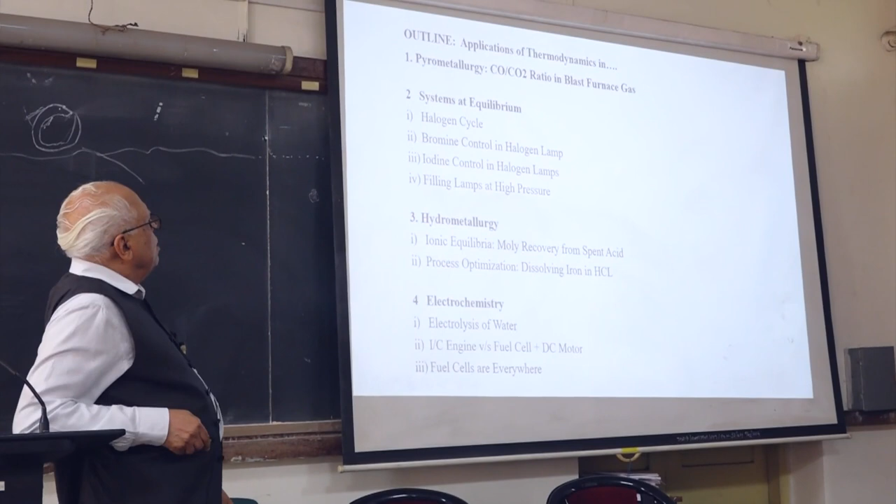So this was for me a big change, to come from looking at excise and sales tax, to looking into delta G and delta F. Let me begin with the first slide. The outline of the presentation is actually case studies. First we look into pyrometallurgy, beginning with blast furnace. Shall I start? So we will begin with blast furnace.

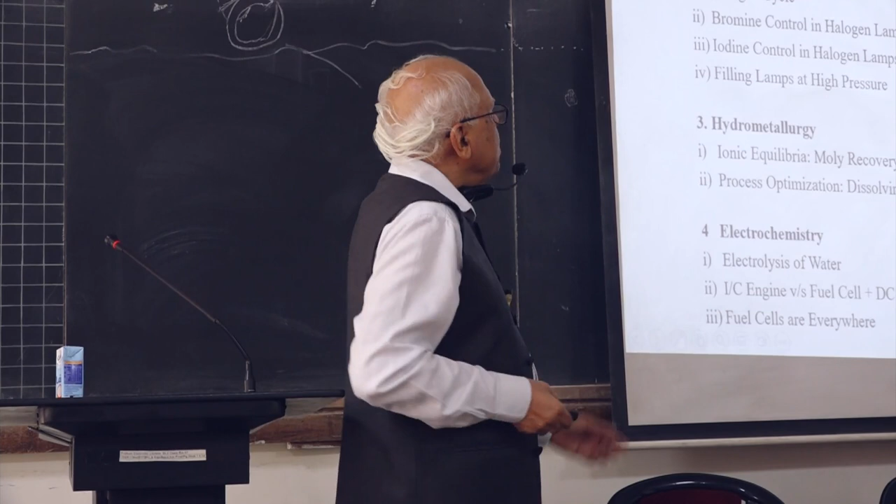When we were undergraduate students, all of us had to go to a steel plant for 2 months of training. I don't know how many people here have - please raise your hand if somebody has seen a blast furnace. You have seen a blast furnace? My God, okay, I'm very pleased that at least there are a couple of them. We spent 2 summers, April and May, in Bhilai taking practical training. Anyway, the blast furnace steel industry was the main employer of the metallurgist, and we'll begin with blast furnace.

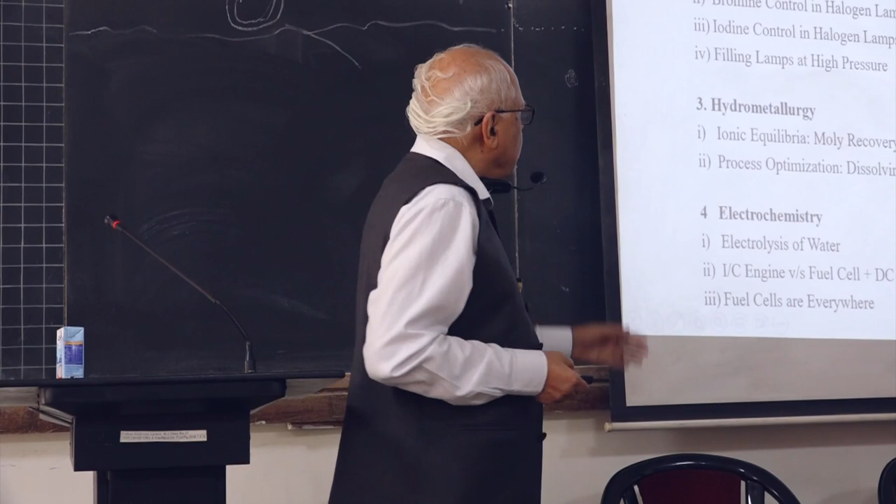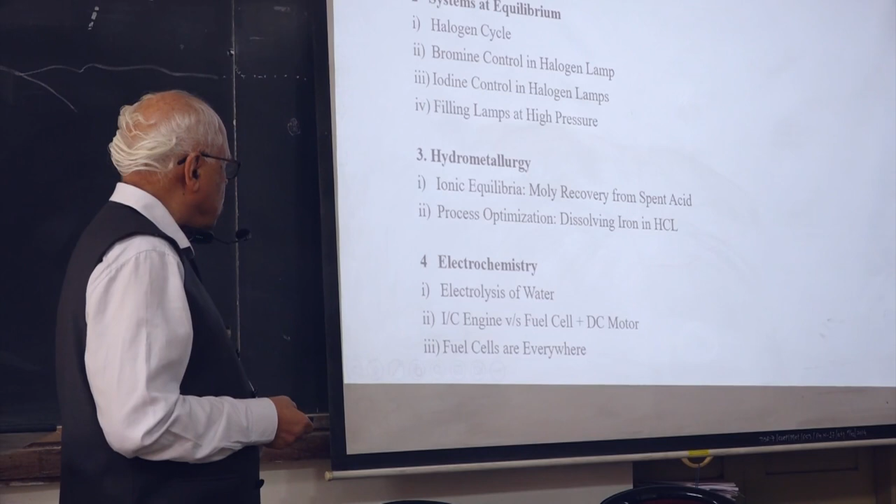Then we'll go into systems at equilibrium. At equilibrium everything is fine, but you want the reaction to go forward - so what do you do? Then we'll look at the equilibrium system, then some examples of hydrometallurgy: molybdenum recovery from waste acid, and optimization of iron dissolving in HCl. We'll finally end up with electrochemistry and go to the hydrogen economy in terms of electrolysis of water, IC engine, and then fuel cells.

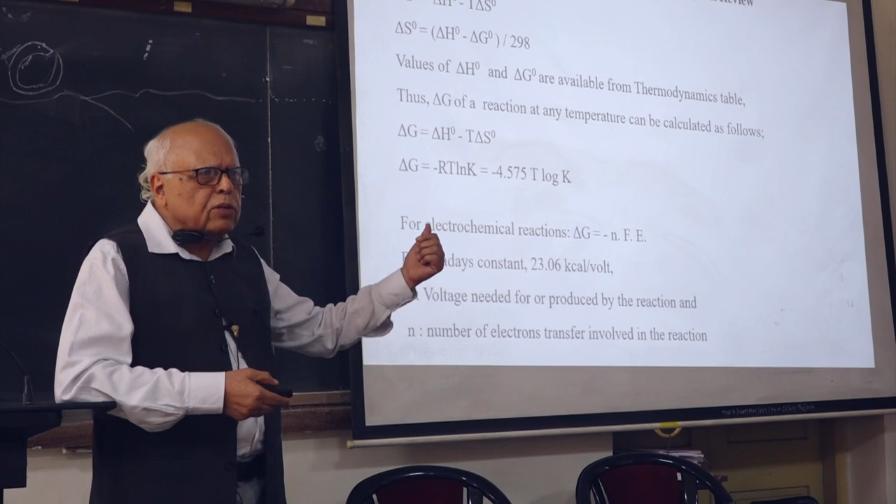So before we go into thermodynamics, let's look at the basic formulas we are going to use. Delta G is equal to delta H minus T delta S - this is the basic equation. But in the literature, you will only find the values of delta H and delta G, you will not see the value of delta S. So you calculate delta S using the same equation at 298 degrees Kelvin, because all the data given in the literature is for 298 degrees standard state. Once you have delta S calculated this way, you can use the formula delta G equal to delta H minus T delta S to calculate the free energy of any compound or any reaction.

This is at 298 now, you can calculate it, you can do T as 1000 and get delta G at 1000 degrees Kelvin. So this we will be using in the calculation.

Another important formula which we will be using for electrochemical reaction is delta G is equal to minus NFE. N is the number of electrons transferred in the reaction, F is the Faraday's constant, and E is the voltage generated by the electrochemical reaction. We will look into both of these in different systems.

First, looking at the blast furnace, as we all know, the feed is iron ore, hematite, coke, limestone, and air at a very high pressure. It's also hot air, preheated. The output is pig iron, slag, and blast furnace gas, which is CO plus CO2. 55% is nitrogen because you are blowing air inside anyway.

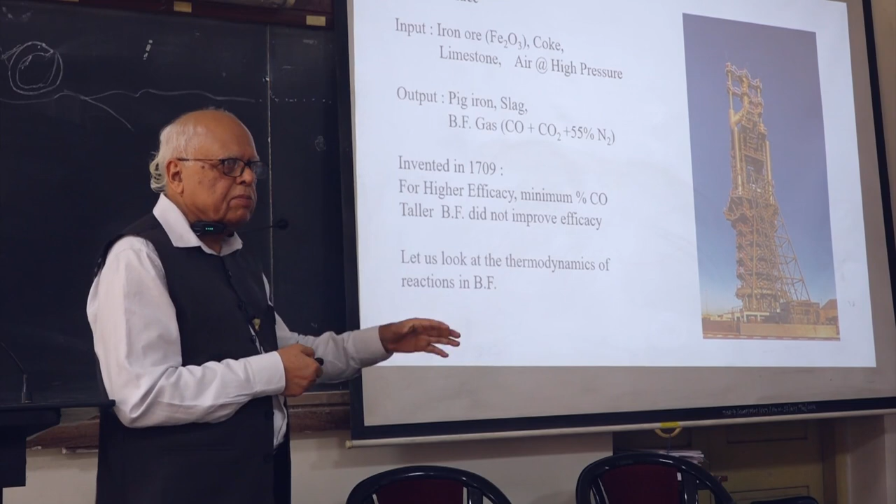This was since the invention of the blast furnace, which was invented in 1709. They could not understand why. They made the biggest blast furnace, tallest blast furnace, but they had the same results. They knew that if you could have lower CO, you would have a more efficient blast furnace, but making it taller and taller did not help.

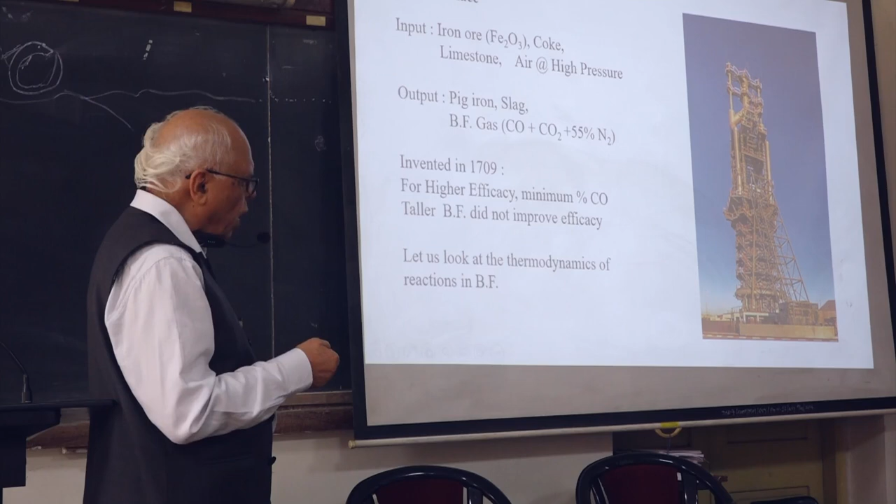So let's look at why this is so, and let's look at the mystery of low CO in the output of blast furnace gas. As you know, iron ore, coke, and so on are being fed from the top, and this is about anywhere from 100 to 200 feet tall. State of the art blast furnaces give 5 to 8 million tons of pig iron per year, so this must be about 100 to 125 feet tall.

So there are many reactions: hematite reacting with carbon monoxide giving magnetite and CO2, then magnetite reacting with carbon monoxide giving FeO and CO2, and then FeO finally reacting with CO giving CO2 and iron. But do you realize that this last reaction is the most important, because two-thirds of the oxygen is eliminated by this equation, more oxygen than the other two put together.

In FeO, the iron to oxygen ratio is 1:1, and in Fe2O3 it is 1:1.5. So this is the most important reaction, and we will look at the thermodynamics of this reaction.

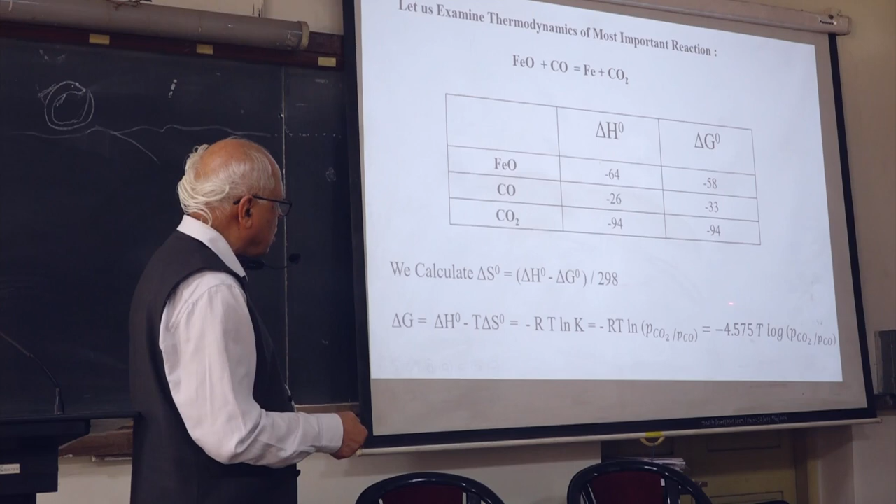Now R is about 2, and when you go from natural logarithm to base 10, there's a factor of 2.3. So these two together become 4.575. Let's now go to the next slide.

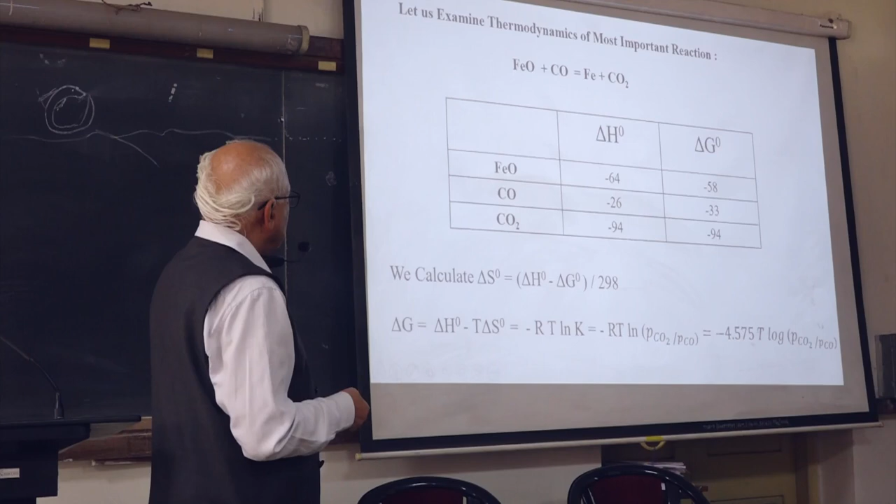This represents the equilibrium between FeO and CO, CO2, and iron. If you take a temperature like 1000 degrees Kelvin, then CO is 62%. Actually the CO to CO2 ratio is important - their absolute value is not of importance, because the oxidation potential depends on the ratio of the two.

If the temperature is 1600 degrees Kelvin, then CO is even higher. Now these are the equilibrium conditions. If you want the reduction to occur, actually CO has to be higher.

Fortunately, there are other reactions taking place in the upper part which give more CO2, but it is very clear that the amount of CO is going to predominantly be a very important component of the blast furnace gases, and you cannot reduce it because it's a thermodynamic limitation of the reduction of FeO. Actually, as I said, even now they are satisfied that if CO2 is about equal, you are doing okay.

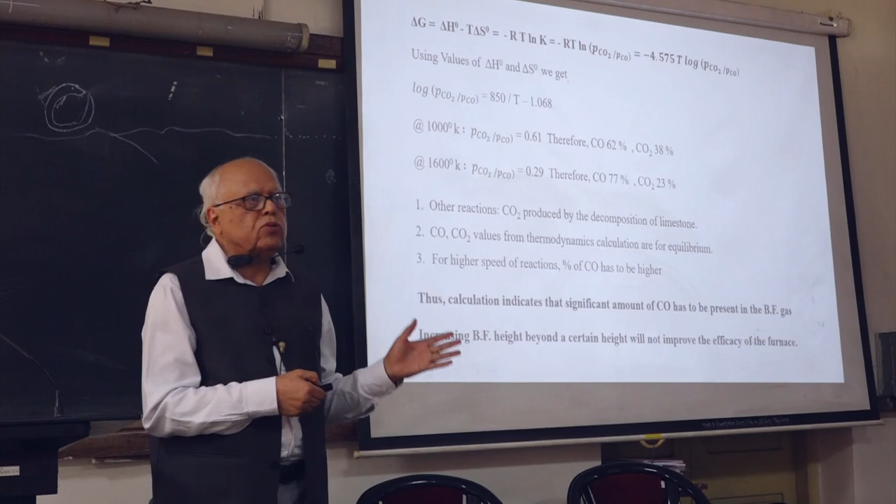So this is how I would say the first mystery of the steel industry, blast furnace, was resolved by thermodynamics. I don't know, maybe in the last century, I don't know when they did it. Let's go to the next slide.

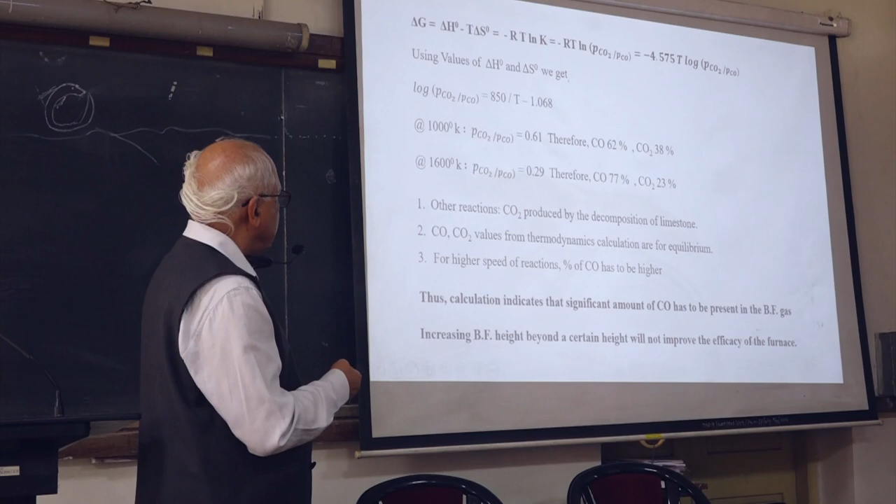We saw this system and we calculated the CO meant for equilibrium. But you know that for the reaction to go forward, the CO has to be even higher to get the reaction, to give a decent kinetics for the reaction.

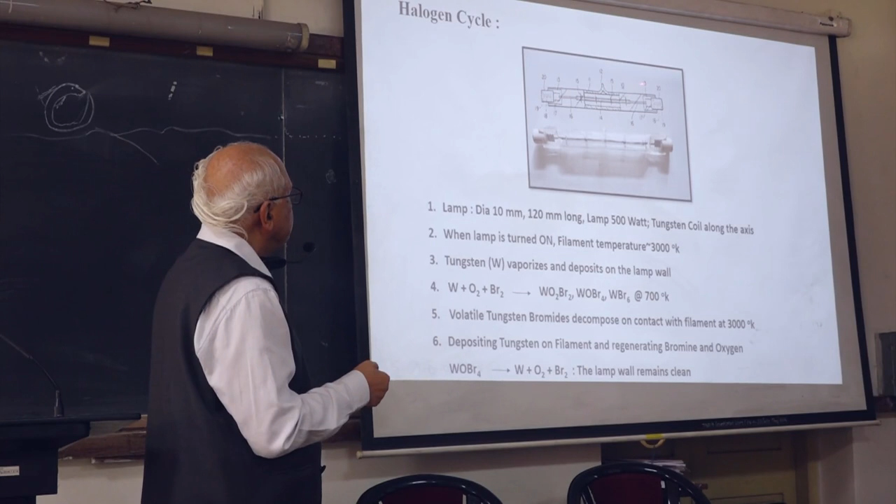Now we'll go into halogen lamp. This is the field I have been working in for the last 40, 50 years. This is a small halogen lamp here, 500 watt. Here along the axis is a tungsten coil, and here there is a pinch seal, and there are support rings of tungsten, and this is filled with about 2 atmospheres of argon and a trace of halogen.

I'll try to explain what happens. If the filament is 3000 degrees Kelvin, tungsten is going to vaporize. And where is it going to go? It is going to stick on the wall. So tungsten vaporizing and sitting on the wall, and wall temperature may be 700, 800 degrees Kelvin.

Now when you put bromine or iodine at 700 degrees Kelvin, this oxygen - there is always a trace amount of oxygen in the lamp - they react with tungsten sitting on the wall of the lamp, and they form all kinds of fancy bromides and oxybromides.

Now these bromides and oxybromides, by random motion, come and touch the filament. When they touch the filament, they decompose, and the reverse reaction takes place. Say one oxybromide going back to tungsten, oxygen and bromine. So tungsten deposits back on the filament, so you keep the wall clean. So bromine or iodine is going around cleaning up the wall. With this system, the life of the lamp is 2000 hours. So this is a near equilibrium system.

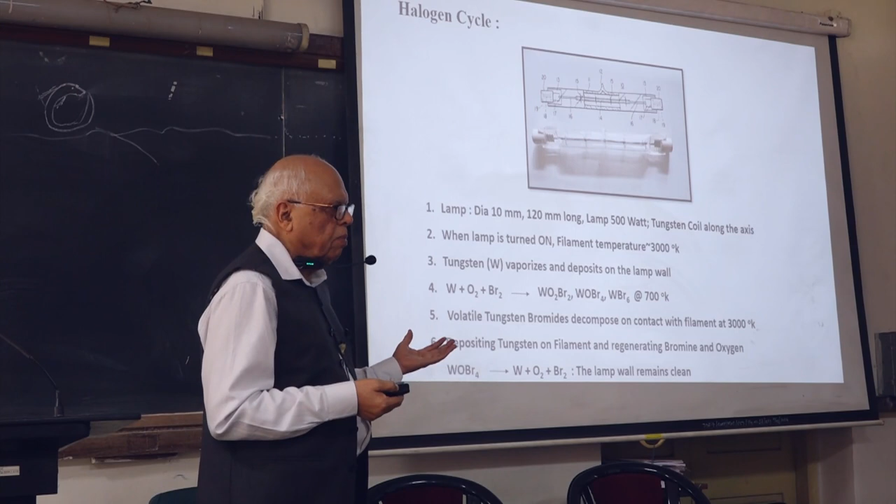Now we look into the traditional way of doing this, and what we thought was a better thermodynamic approach. The traditional way of making bromine is to have cylinders filled with argon and with methylene bromide. Methylene bromide is a gaseous compound of bromine, and it is mixed in the cylinder.

All you do in the last step is evacuate, clean up the lamp, and put in argon and methylene bromide, and freeze everything. But if you want to control bromine content, say 0.1, 0.2, or even up to 1.5%, you need different cylinders with different amounts of methylene bromide. At Westinghouse, we used to have a dozen cylinders with different amounts of methylene bromide. Well, this was the standard process.

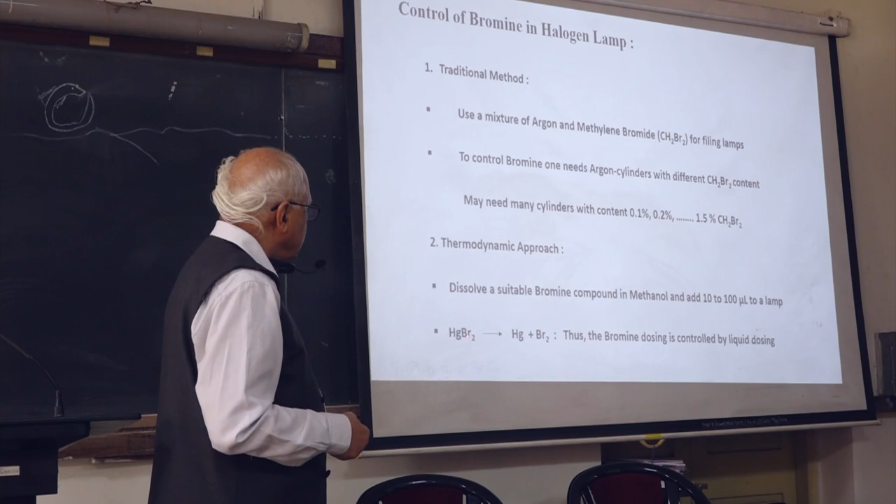I thought of doing something else. I said, why do you need a cylinder? Why can't we use some bromine compound? So we tried mercury bromide, which could decompose into mercury and bromine. So what we did was take some mercury bromide, dissolve it in methanol, and take just a few 10 microliters, and dispense it in the lamp. Since it's in methanol, it vaporizes. So you are putting a very measured quantity of micrograms of bromine into the lamp.

Now what happened? The company was not able to manufacture the stage and studio lighting lamps because they are the most demanding - the temperature of the filament there is 3200 to 3400 degrees Kelvin, which is almost 0.9 times the melting point of tungsten. So with these, either the lamp would blacken or fail early.

But when they used mercury bromide, you will see, if the rated life of the lamp is supposed to be 50 hours - because the color temperature of this lamp is very high - so for bromine we could use from 4 torr to 8 torr and still get a good life. So with this technology, Westinghouse was able to launch this whole series of stage and studio lighting lamps.

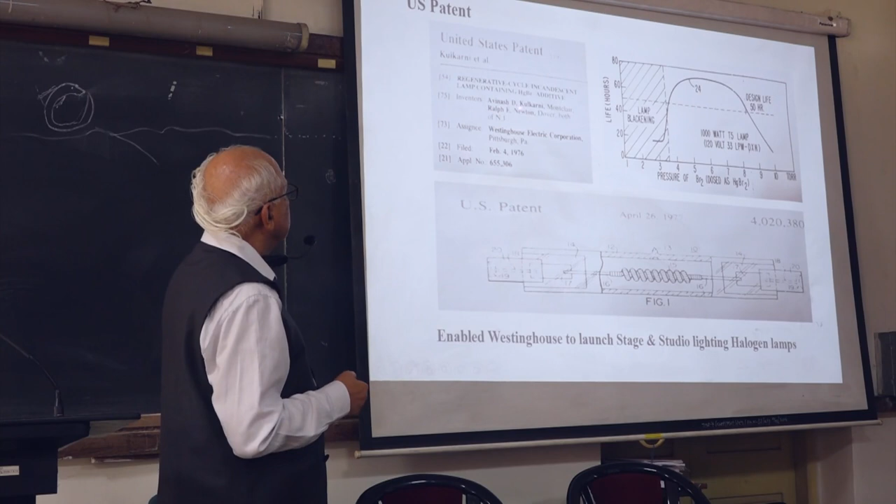This resulted in a patent, as you can see, a US patent by Westinghouse, and they were able to enter this particular new range of products using this technology.

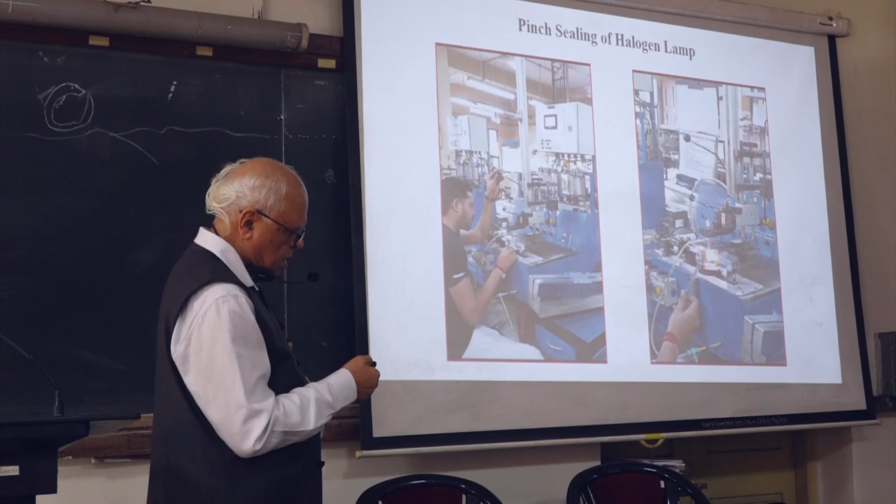I would like to show how this lamp is sealed. This quartz glass - the oxyhydrogen flame is rotating on the burner for about 10-15 seconds.

This is the second side. The first side is sealed. Now you are continuously passing nitrogen through so that it covers the tungsten filament, otherwise it will get oxidized. The second side is also sealed. So now this lamp is ready for putting in inert gas and bromine for the finishing step, what we call exhausting the lamp.

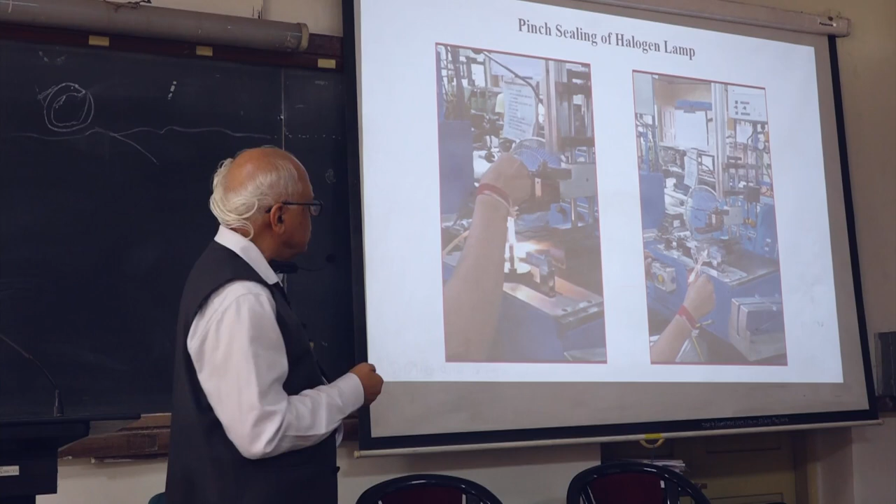Now we saw one bromine technology, how the traditional technology was changed by using mercury bromide. Now the halogen lamp was introduced sometime in 1958. At that time the halogen lamp meant iodine lamp, because iodine was the most - as you know, 7th group: fluorine, chlorine, bromine, iodine, astatine - so iodine was the safest one to work with, and iodine vapor pressure, you see...

This is iodine vapor pressure at 60 degrees, 4.4 torr. This is about the amount of iodine you want in the lamp, 4 torr or so. Now you have seen how we make this lamp up to this point.

Now this lamp is already filled with 2 atmospheres of argon, and you have to put iodine. So they put a pinch of iodine in the exhaust tube and just heat it so that it's only milligram. It melts and stays there.

Now if you want to dose iodine, you put the whole lamp at, say, 60 degrees, the iodine pressure will be 4.4 torr. But you will have to keep it for half an hour, 45 minutes, because it will take time for iodine to vaporize, fill, and come to equilibrium, to steady state.

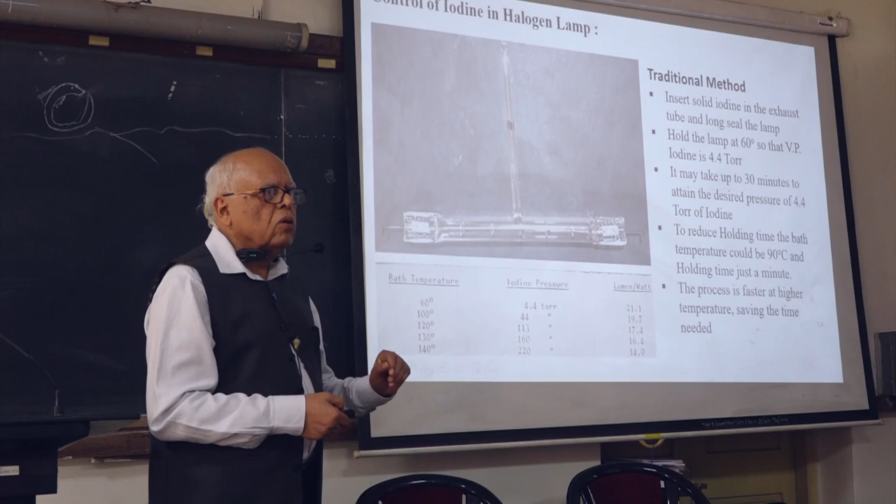But in manufacturing, who has got the time to wait for half an hour? So they use a temperature like 100 degrees or 120 degrees, and they use it for only 1 minute, 50 seconds. So naturally, going to equilibrium is too time consuming. For the sake of kinetics, they increase the temperature.

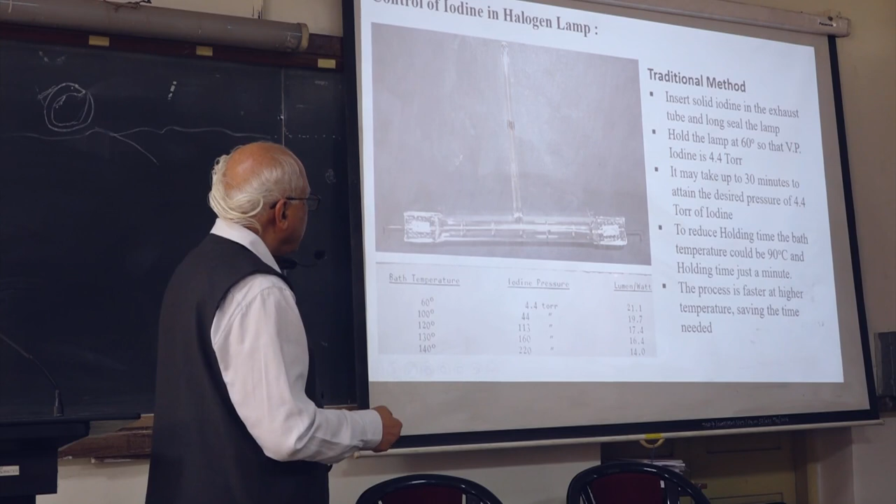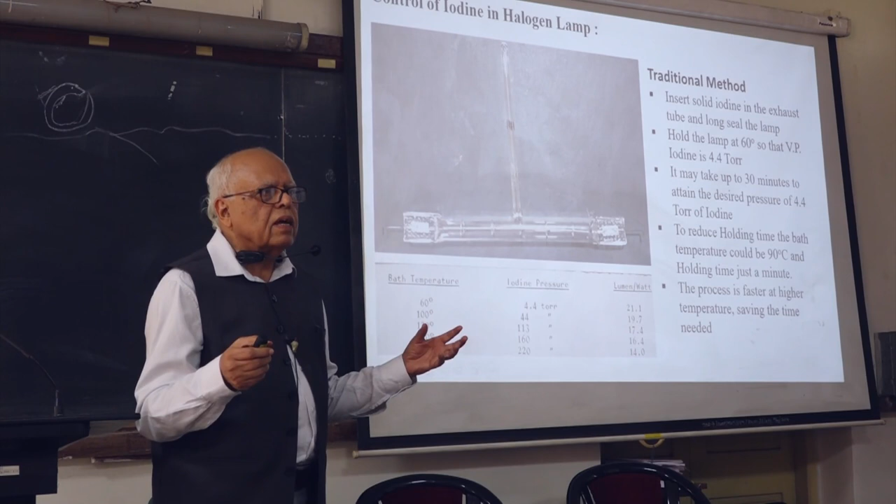As one of the trial experiments, I tried to fill lamps with different amounts of iodine using holding temperatures like 60, 100, 120, 130, 140, and I made all those lamps and measured their lumen output. Because as you increase the iodine pressure, the iodine is a very purple colored gas, so it absorbs light. More iodine you put, less is the light output, so lumen per watt drops steadily as you increase the iodine.

What was my solution to this? I thought this was a very long process. So instead of using iodine element, why not try some other compound like tin tetraiodide?

I went through all kinds of halogen compounds and zeroed in on this tin tetraiodide, because tin tetraiodide would decompose into SnI2 and I2. If you dissolve this SnI4 in alcohol and inject maybe 10 microliters, 20 microliters, you have dispensed a precise amount of iodine in the lamp.

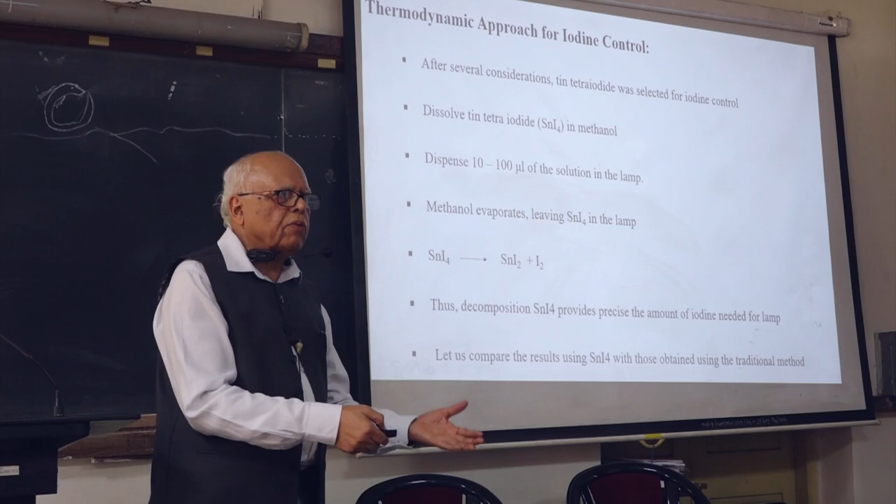And now you exhaust the lamp. You don't have to sit there keeping the lamp at 50 degrees centigrade for 2 hours. You already dispensed it, and then you can exhaust the lamp, fill it with 2 atmospheres of argon, and the lamp is ready. So this was a ridiculously simple process compared to what it was earlier.

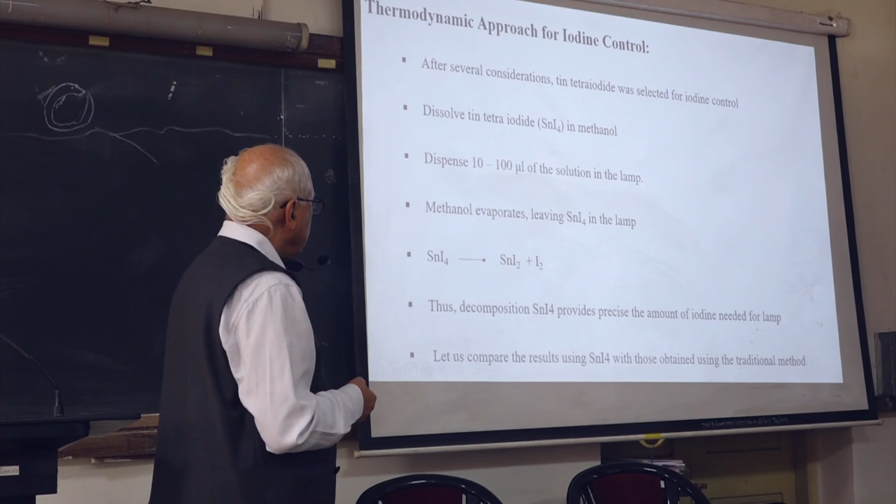Now they decided to take trials. So on 4 consecutive days, we made lamps using both processes, the standard traditional iodine process and the SnI4 process. So here are the results.

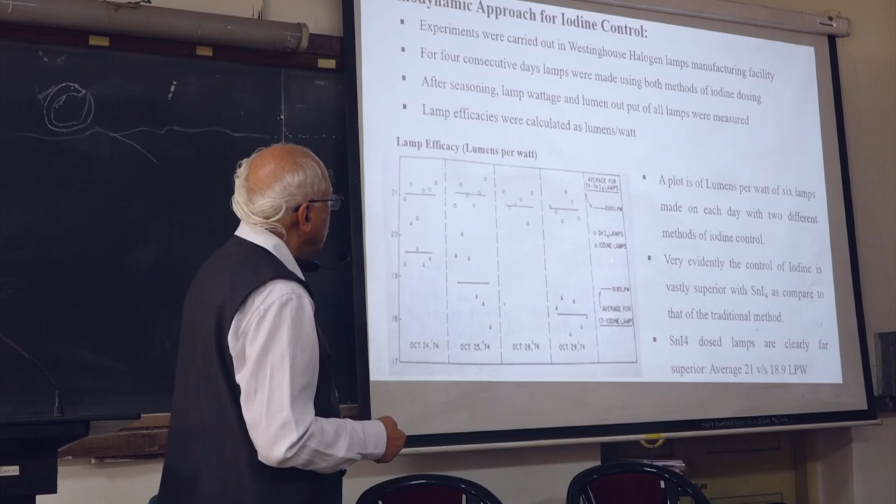So the average of all these lamps for SnI4, we had 21 lumens per watt, while this was 18.9. So a clear 10% improvement, and what is more important, the process control is very precise.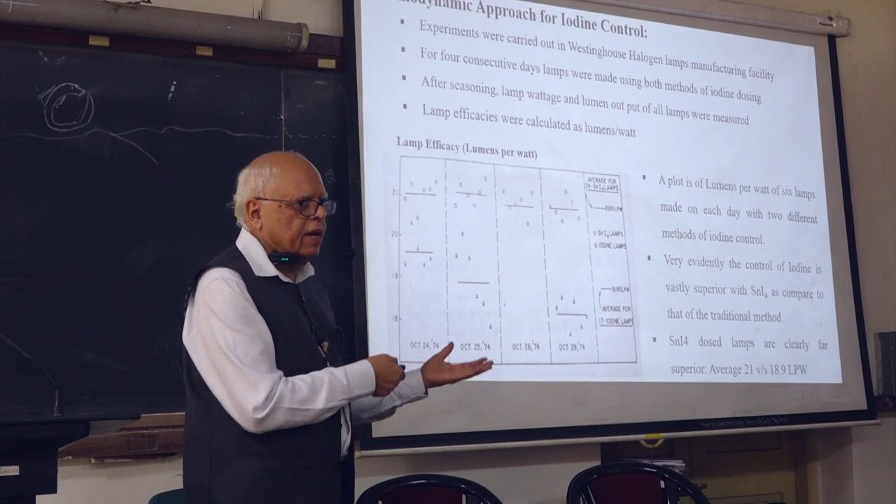Anyway, they never used this technology because they were so comfortable with their conventional process that I could not change it. You can only bring the idea and get it patented. Whether the engineering department accepts it and changes the process is up to them.

So this of course resulted in another patent. You can see, regenerative incandescent lamp with SnI4. So this was another patent which resulted from this.

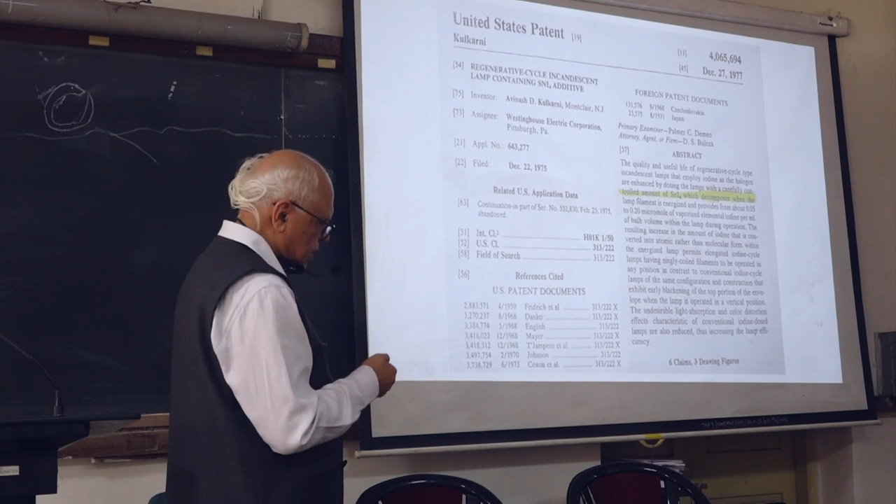I just want to give an idea. I was telling you that we fill these lamps at 2 atmospheres, some we fill at 3 atmospheres. How do you do it? When you fill a lamp with 3 atmospheres and try to seal it, meaning you melt it there, when you melt it at 3 atmospheres, it's going to blow out.

So what do you do? We do what is called cryogenic filling. That means this halogen lamp is on the exhaust bench. You isolate it, fill with 2 atmospheres in the manifold, isolate the lamp from the manifold, and slip a liquid nitrogen cylinder around it.

So liquid nitrogen will freeze the argon, and the vapor pressure of argon at liquid nitrogen temperature is only 200 torr, which is 1/4 of an atmosphere. So the pressure inside the lamp is now less than atmospheric. You seal the lamp, and when it comes to room temperature, it's 2 atmospheres.

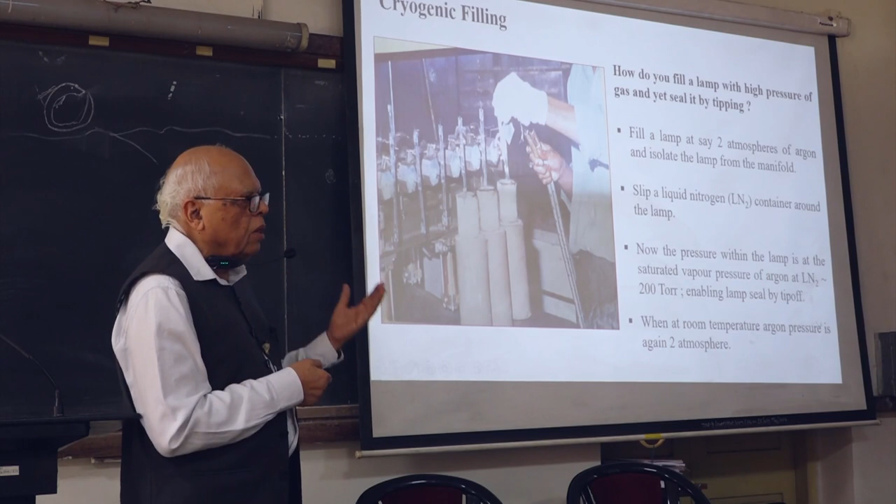This is called cryogenic filling. Can you believe we used to make 1 lakh lamps a month, and the price of this lamp is like 30 rupees? So we just stopped making this lamp because it didn't make any sense - go through all this process and get 30 rupees, it's not worth it. So anyway, this is how we make it. I thought cryogenic filling was a good technology, and again it depends on the vapor pressure and temperature relationship of any gas.

Now next we will talk about coil making. See, all these lamps have got tungsten filament. The lower one is coiled coil, you can see - a coil, and that coil itself is coiled. This is a single coil, and this is a segmented coil. There is a coil, then a gap, again coil, gap.

Now how do you do this? For making this, you first wind the tungsten on a mandrel. What kind of mandrel you use depends upon what temperature this lamp is going to operate at. This is the most demanding of all these applications, so here you use a molybdenum mandrel. For some of the lamps, you can get away with an iron mandrel because the application is not so demanding. So you do the coiling of the lamp.

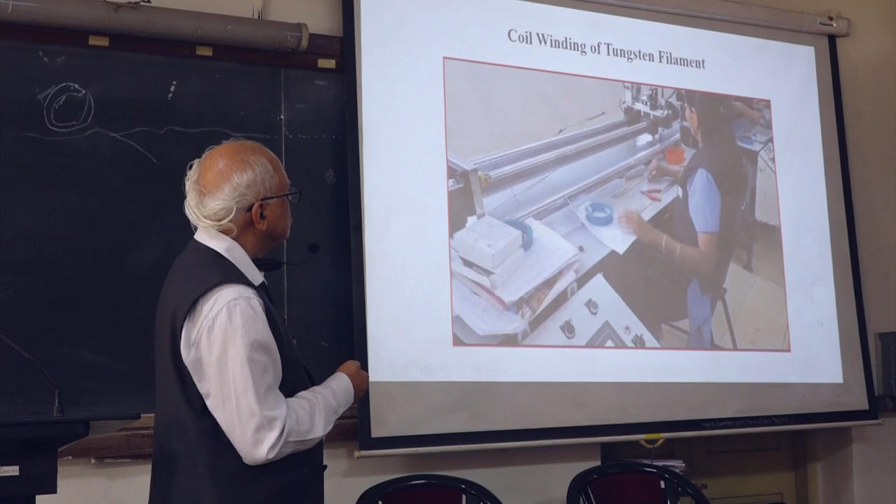Coil making is done this way. This is an automatic machine, numerically controlled. The coil is made.

Now for winding the filament, as I said, you either use an iron mandrel or a molybdenum mandrel. Iron mandrel is for lamps which are not so demanding, which you can heat up to 800-900 degrees centigrade - if you heat higher, the tungsten gets contaminated. But if the application demands it go to 1600, 1700 degrees centigrade, then you have to go to molybdenum mandrel.

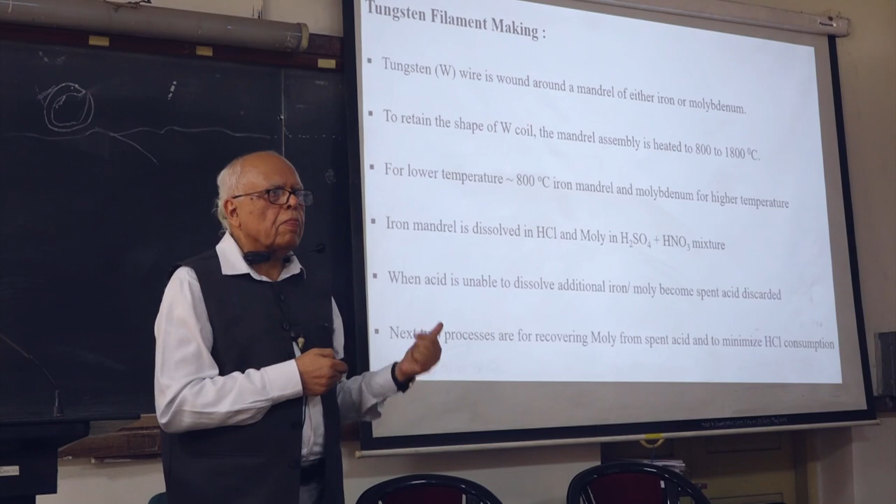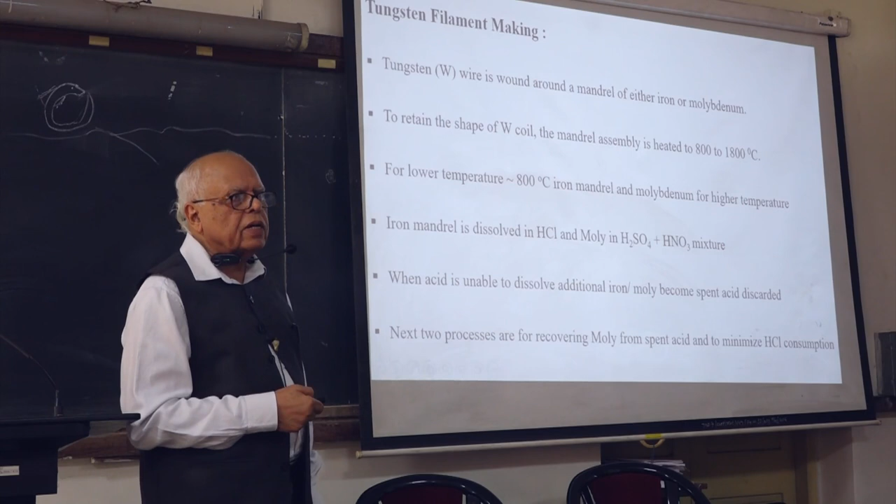So to retain the shape, you have to go to 800 to 1800 degrees centigrade. 800 degrees centigrade is iron mandrel, and once the mandrel is formed, you cannot pull it out, so you have to dissolve it. The normal process for dissolving iron metal is to dissolve in HCl. But for molybdenum, you use a mixture of sulfuric acid and nitric acid. You dip it, then the metal dissolves and your coil is clear, and you just clean the coil and make the lamp.

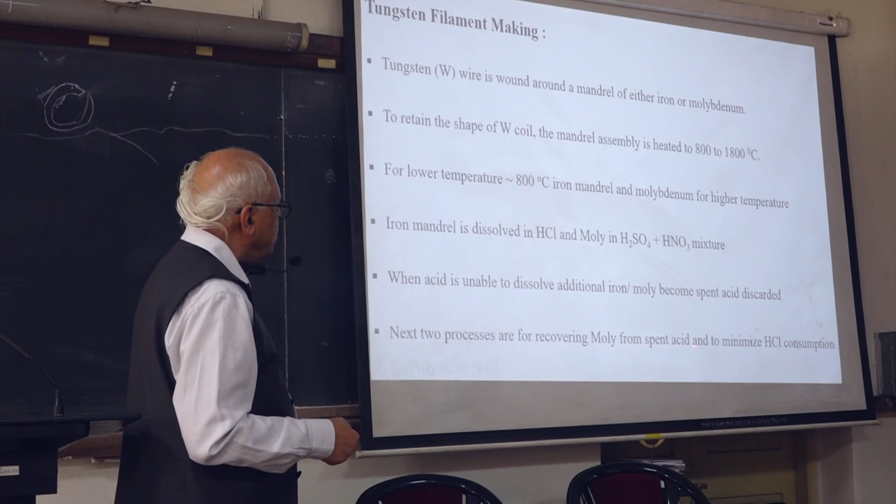The next two processes are for recovering molybdenum from spent acid and to minimize HCl consumption in this whole dissolving operation. Let's look at these two processes.

Recovery of molybdenum from spent acid. Now you've got thousands of coiled coils in which molybdenum metal is there. You put it in nitric-sulfuric acid at a certain temperature, and after a while the molybdenum dissolves, but the acid has a limitation - it can't dissolve any amount of molybdenum. Say about 80 grams per liter, it stops dissolving. So what they did was discard the acid.

Now use fresh acid. So one of the, I think, very first few months I was there, I thought this is a colossal waste. I should do something, even though this has nothing to do with my project. So I started working on this idea, and found out the molybdenum dissolved in aqueous solution. So molybdenum is going to exist as some kind of MoO2 plus - in fact, there are many more species of molybdenum.

So I realized there's something called an isoelectric point. I did not know what it exactly meant. I found that it meant the net charge on a species is zero - you have your positive charge species, your negative charge species, and the net charge is zero. It was just logical that if the net charge is zero, they should combine and neutralize and settle down. And since there were so many other ions present...

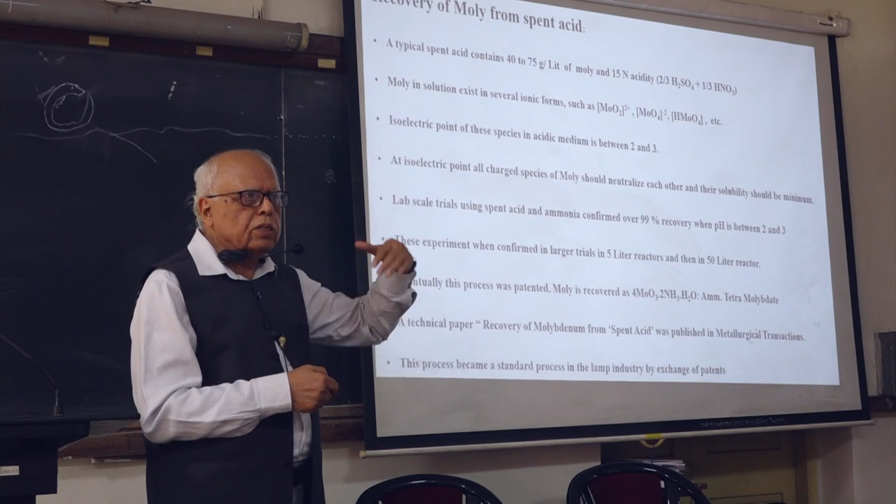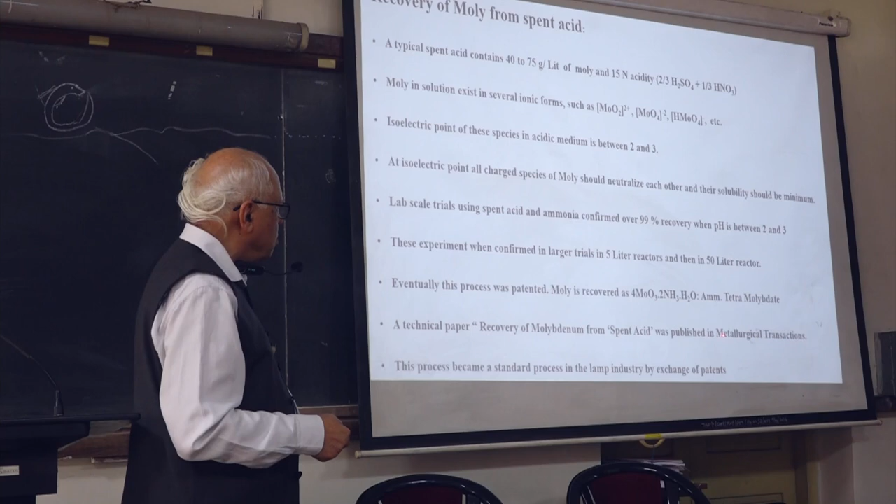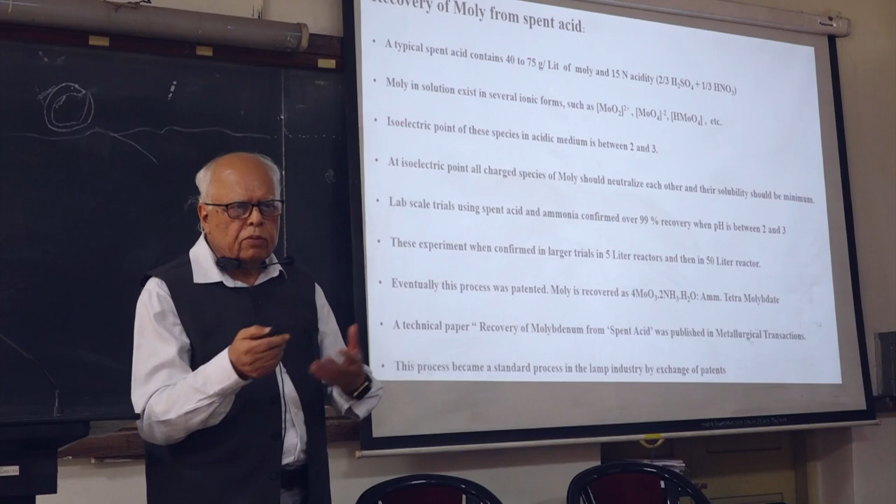99% recovery. So in the meantime, there were some other projects thinking of distilling these molybdenum acids and recycling them, but this turned out to be an extremely simple process. We published a technical paper, got a patent, and also a technical publication in Metallurgical Transactions. This process became standard in the whole industry, because GE and Westinghouse would exchange patents, and Sylvania would patent too, so it became standard across the industry.

So this is the first patent which I got, in February 1975, almost 50 years ago - molybdenum recovery from spent acid.

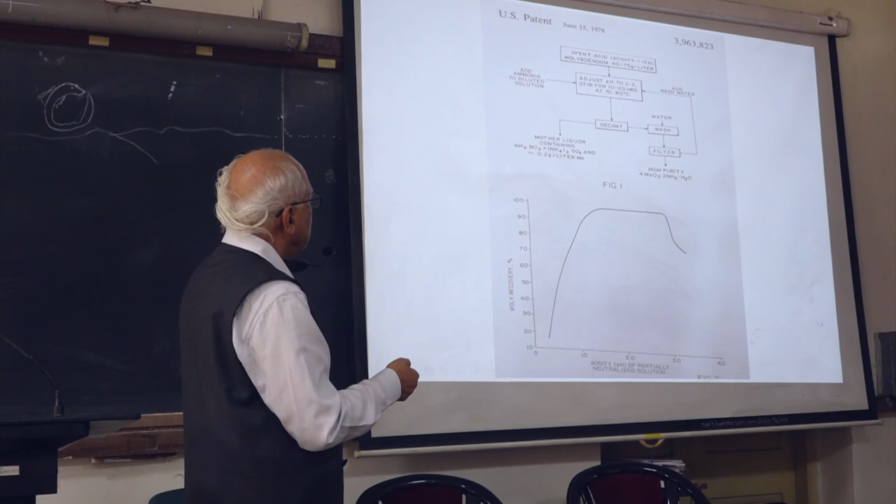This is the graph. As you can see, between pH 2 and 3 there is almost complete recovery, 99%. So the process is: take spent acid, add ammonia, adjust the pH to 2-3, and stir it for 10 to 20 hours, add wash water, then filter.

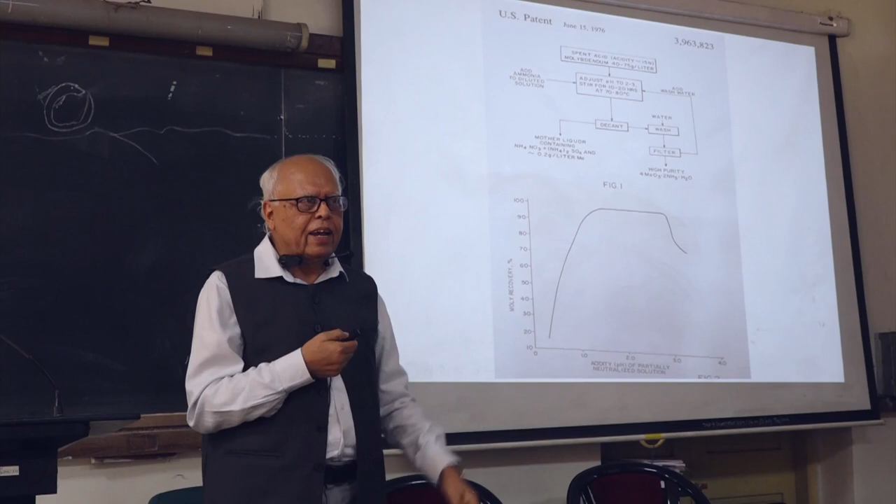Ten years later, one of my colleagues filed another patent on this. He said, why wait for 10 hours? He just put some ammonium molybdate to begin with - he did seeding. So instead of overnight, it became a 3-4 hour process. I never thought about it. Somebody later thought, why should I wait for 20 hours? I can just put in seeding. So this process improved still further.

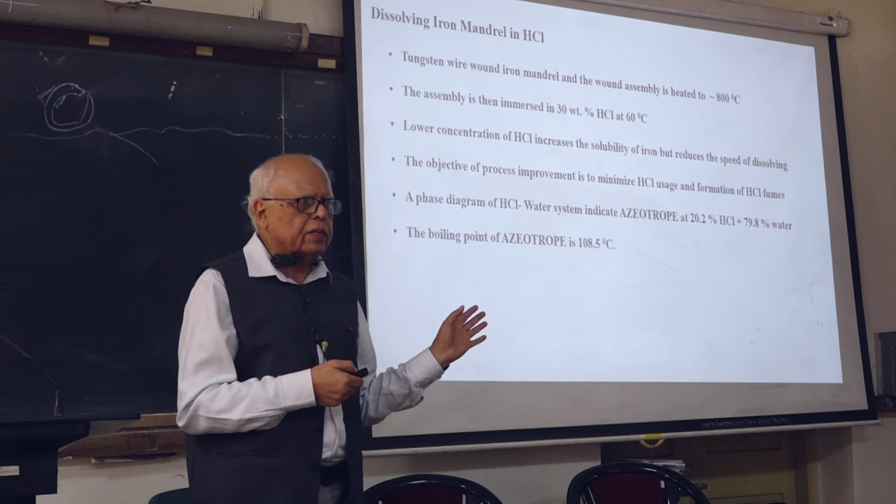Now let's look at the other process, dissolving iron mandrel using HCl. It's 30% acid, that's standard - even in India if you order HCl it's 30%, in America also 30%. So all they did was take the acid, put it in a reactor, heat it, put tungsten coils in, and heat it to about 60 degrees centigrade. It used to give a lot of HCl fumes, and eventually it would dissolve. When I looked into this, I thought - can you believe this was at least a 30-40 year old process?

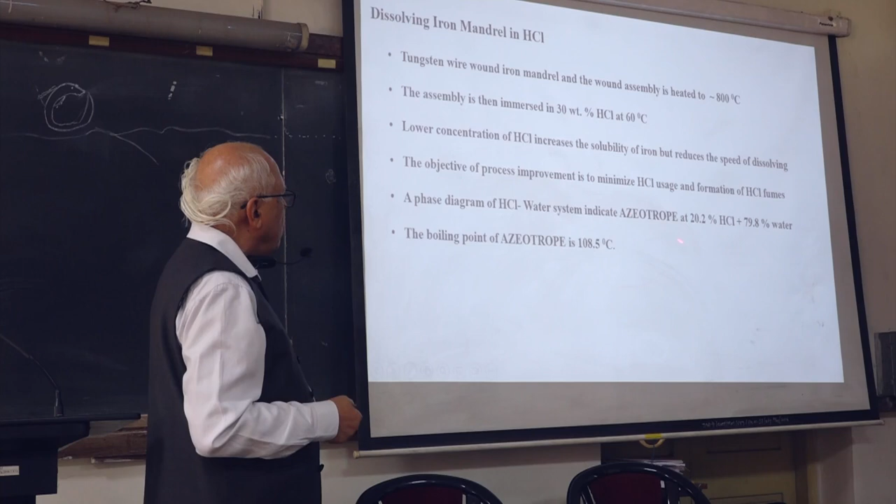But if you look at the phase diagram, the HCl-water system, you realize there is an azeotrope at 20.2%. That means it's constant boiling - at 108 degrees centigrade, the HCl and water boil at the same temperature. It's like alcohol - alcohol with 4% water is an azeotrope, you can't separate it, you can't increase the alcohol percentage by distillation. Same here, the azeotrope. So I said, why not try this? If you can, the azeotrope boiling point is 108.

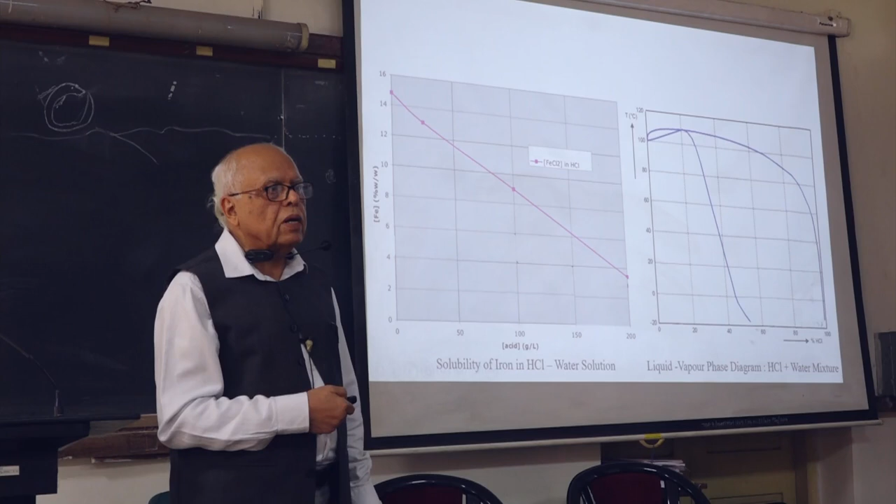So the process was modified. Here's a technical reason, and another reason: if you reduce the concentration of HCl, the solubility of FeCl2 increases. So you have a double advantage - you're using 20%, diluting the acid, and at the same time solubility of iron is increasing, and now you can raise the temperature to 80 degrees centigrade because the vapor pressure of HCl is so much lower - 20-25 times lower. At 20% versus 30%, it's 20 times lower. So you can raise the temperature, and here is the azeotrope, the vapor pressure of HCl, and they boil at the same time at 108 degrees centigrade.

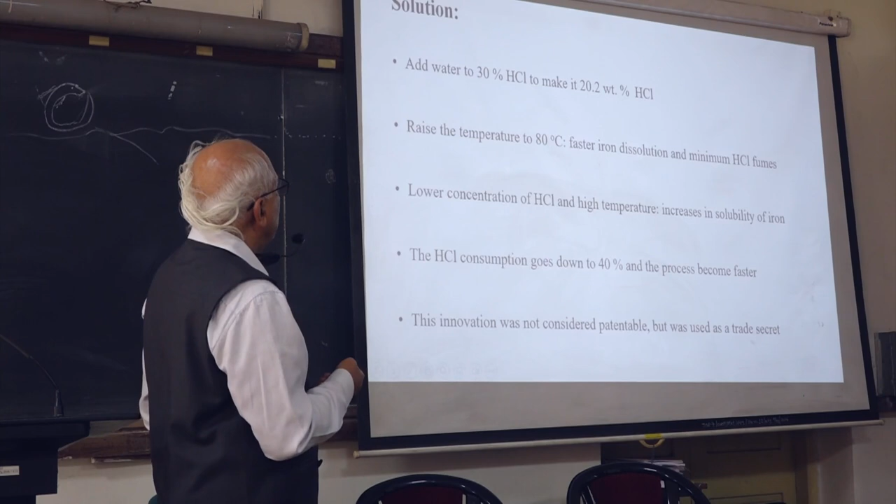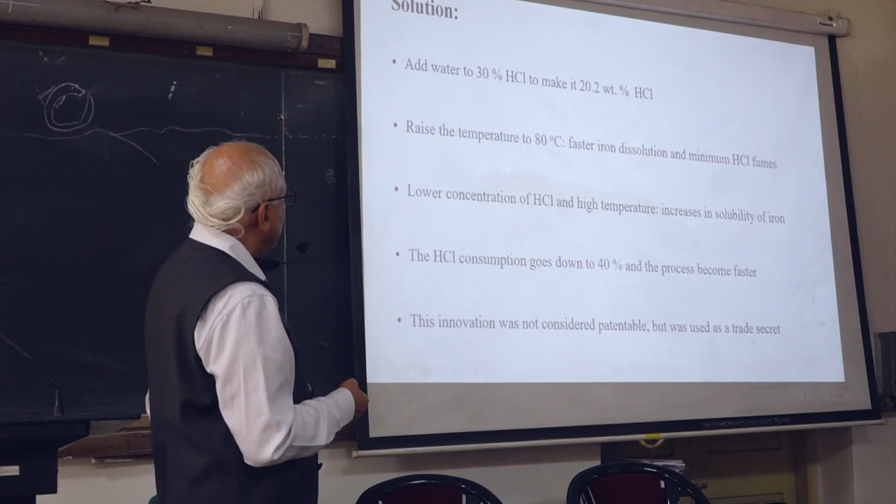The solution was: take 30% HCl, dilute it to 20.2%, go to the azeotrope mixture, raise the temperature to 80 degrees centigrade for faster dissolution. With lower concentration HCl, you can use higher temperature and get bigger solubility of iron. HCl consumption goes down to 40% - what you were using as 100, now you can do with 40. This innovation was not considered patentable, it was used as a trade secret, so it doesn't matter, I get a $100 award anyway.

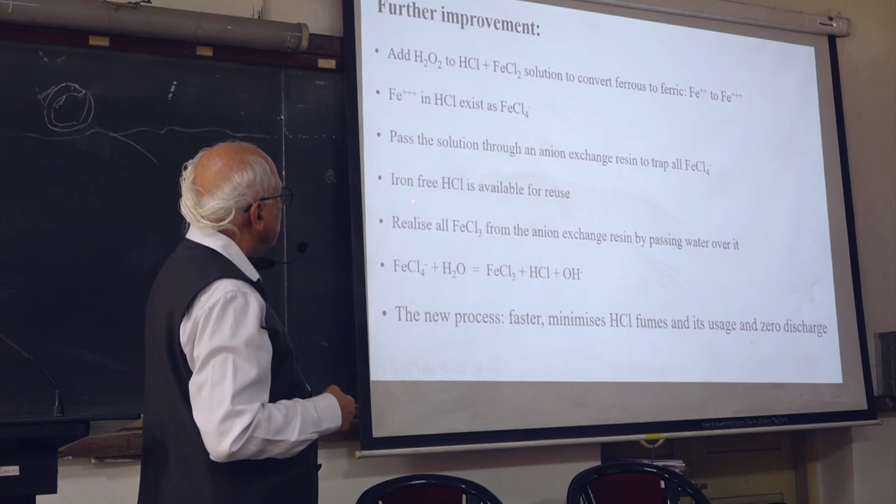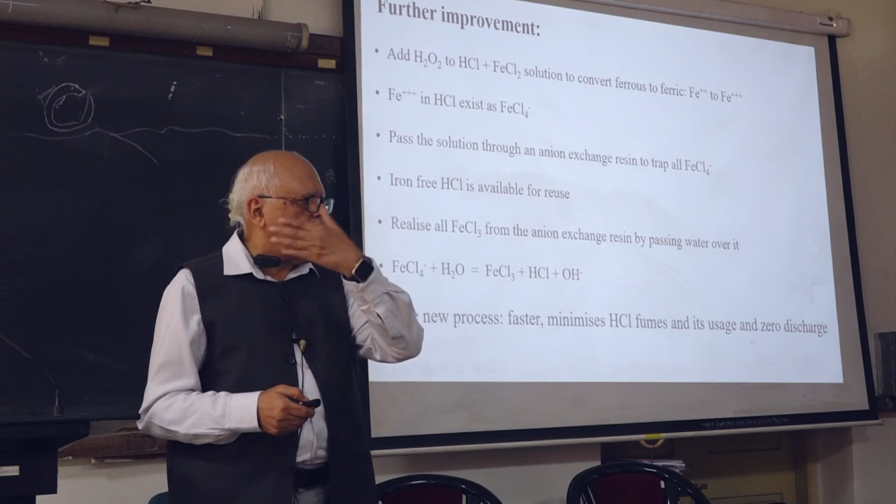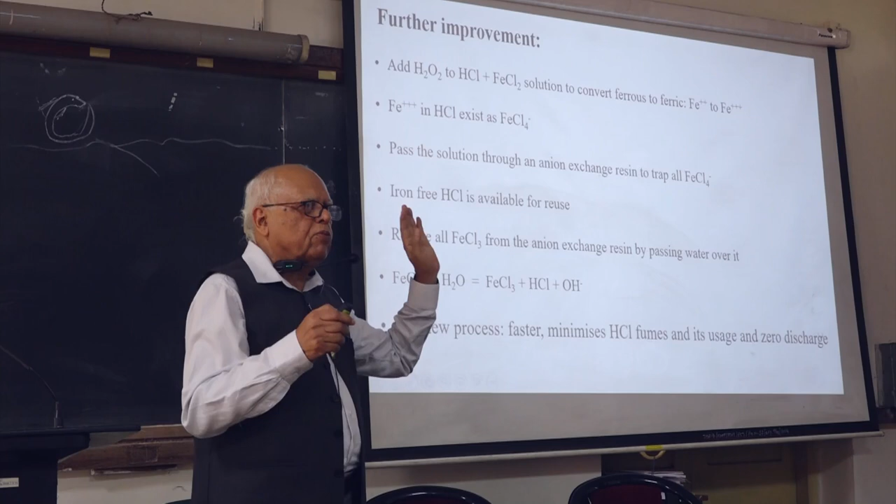So this was not the end of it. We thought we could improve it further, make it zero discharge. How do you do this? The spent HCl, you use peroxide, so ferrous gets converted into ferric. The beauty is when iron is present in ferric form, it's not FeCl++, it's FeCl4 minus - trivalent iron in HCl is actually an anion. So what you do is take the solution and pass it through an anion exchange resin, which will capture all the FeCl4, and the HCl is regenerated so you can reuse it. The FeCl4 you can wash down with water and get FeCl3. So here there's an opportunity to make it almost zero discharge, all the acid is being recycled, there is no waste. But anyway, they never went to this because they were quite happy with 40% - they felt they benefited enough and weren't greedy, they were happy with whatever they had received.

Now I am turning to electrochemistry. First, let's look at what is grey. We are talking about the hydrogen economy, and there are two terms very frequently used - is it grey hydrogen or green hydrogen? Grey hydrogen is derived from decomposition of, say, methane - you decompose it and get hydrogen, that's grey hydrogen. But if you do electrolysis of water, that's green hydrogen, especially when you do it with solar energy.

Now look at the thermodynamic parameters of H2O, gas and liquid - here is delta H, delta G, and so forth. So delta G of water as liquid is 56.7. If you put it into NFE, where N is 2, F is 23.06 kilocalorie per volt, and E is the voltage, you calculate the voltage of this electrolysis is 1.23 volts, which is standard. You take water, add some acid, electrolyze it, and you get hydrogen and oxygen - nothing surprising there.

But what is surprising is that if you again try to create hydrogen and oxygen together through an electrochemical process using a hydrogen oxygen ion conductor, that means creating a fuel cell, then also you will get the same 1.23 volt. That means you are talking about the reverse reaction, O2 plus H2 forming H2O. This also will happen at the same voltage. Of course, there are some inefficiencies, so this voltage may be 1.24, or it may be 1.3 or 1.4 also. But this is a reversible reaction.

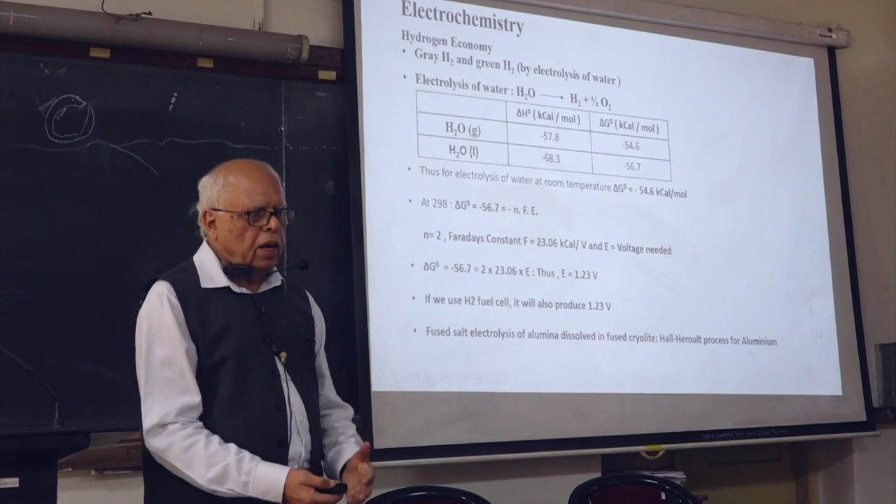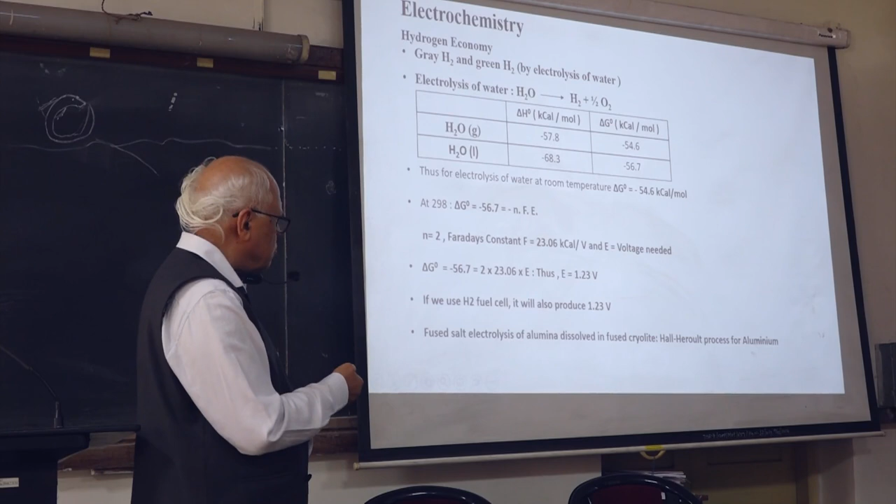Aluminum, 200-300 years ago, was as expensive as gold and silver. It was Hall and Heroult who found out that you take aluminum oxide and dissolve it in what they call fused cryolite, AlF3 3NaF. You dissolve it as a fused salt along with alumina and you electrolyze it. The bottom is the cathode, where all the aluminum is reduced and collects at the bottom, and the oxygen goes up. This is how we manufacture aluminum - this is a standard process globally. So this whole electrochemistry - one of the biggest examples of a metallurgical application is the metallurgy of aluminum using electrochemistry with this fused cryolite as an electrolyte. Again, it has to be an ionic conductor - if it is an electronic conductor, it will just short circuit.

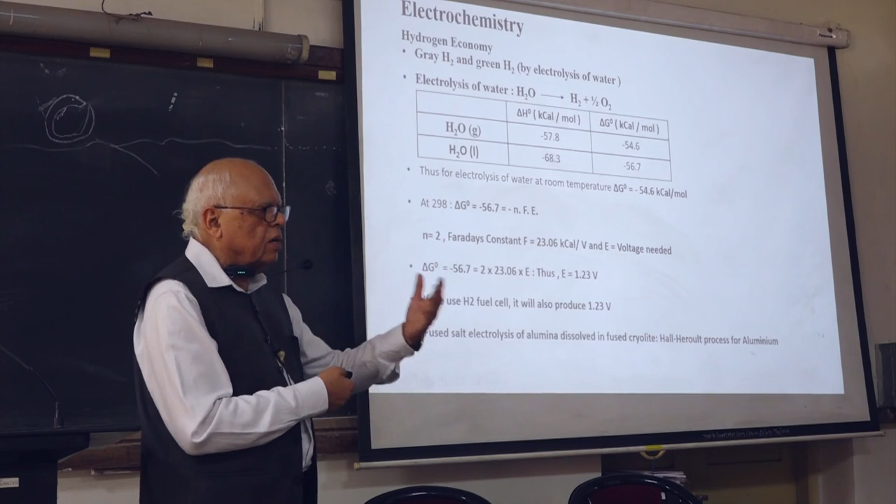Now let's look at this very fascinating thing. You can use hydrogen in an IC engine as a fuel, just like diesel or petrol, with oxygen also. But once you use hydrogen as a fuel in an IC engine, you are limited by the Carnot cycle - adiabatic compression, adiabatic expansion, isothermal compression, isothermal expansion. That limits you, you can't go beyond 35%.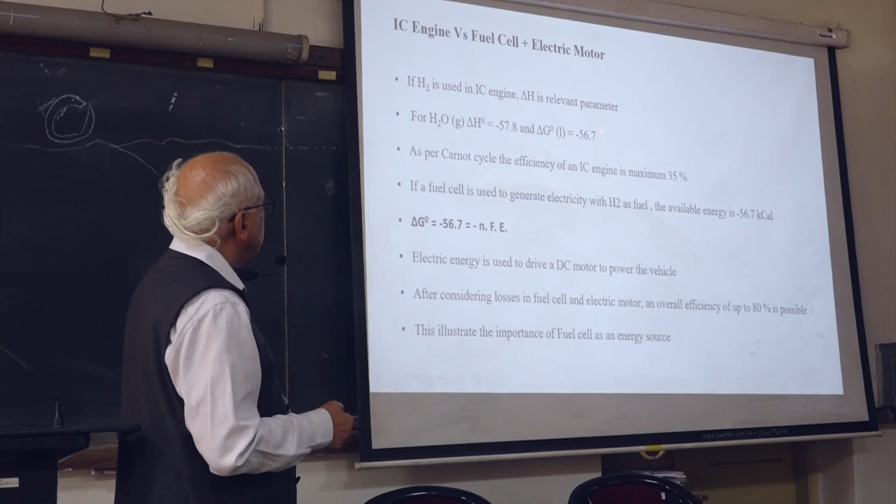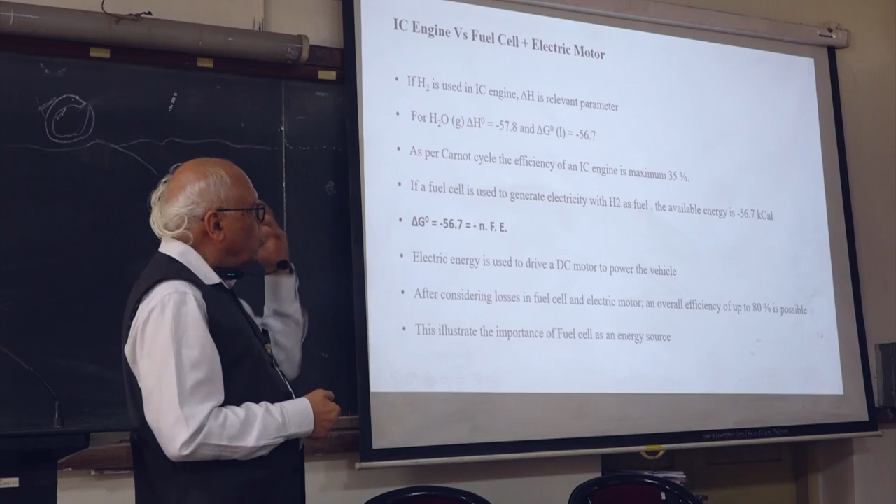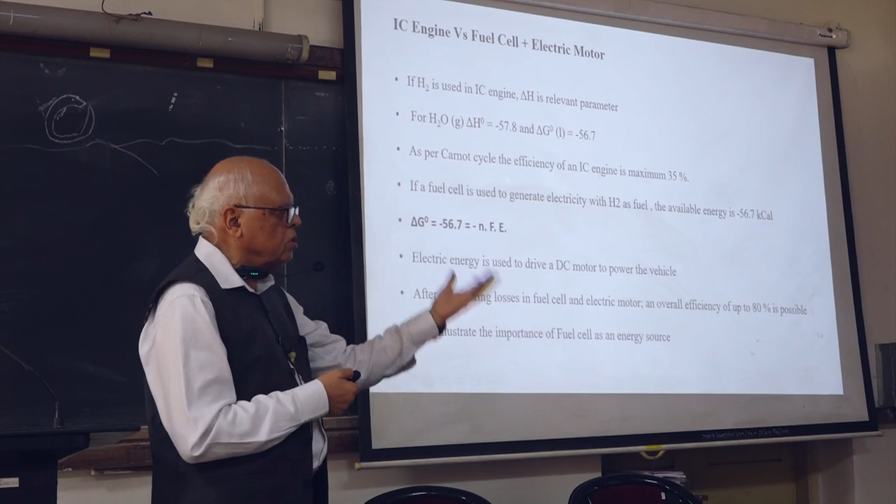But if you use a fuel cell, look at this: delta H is 57.8, delta G is 56 - it's about just a kilocalorie apart, about the same. But when you use this formula, the entire free energy gets converted into electrical energy. So with an IC engine you get 35%, but if you use a fuel cell, converting hydrogen using ionic conduction of oxygen, you can get efficiency like 80-90%. You can double the efficiency of an IC engine if you use a hydrogen fuel cell instead of hydrogen as a fuel. So you can see how important this whole development is.

Now I am going to talk about something I know very little about, but I cannot resist talking about it - how does the human body work? In the human body we have glucose, and glucose ends in an aldehyde group. If you have fructose, it will end in CO, a ketone. Now, glucose plus 6O2 equals CO2 plus H2O.

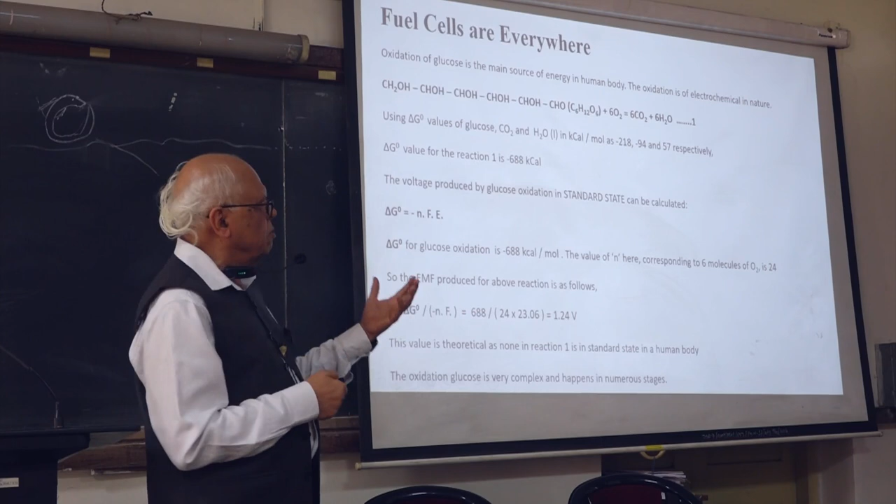If you use the same formula, delta G equals minus NFE, you get a result again very close to 1.24 volts. But this result is not really accurate at all. Why? Because for this formula to apply, you have to have glucose in the standard state, which would be pure solid state, meaning oxygen is at 1 atmosphere. Actually it may be at 0.2 atmosphere, or it will dissolve into something in the human body. CO2 should be at 1 atmosphere, but in our case it will be only 1/10 of an atmosphere, and H2O is there too. Anyway, this tells us that our whole body is actually doing electrochemical oxidation of glucose.

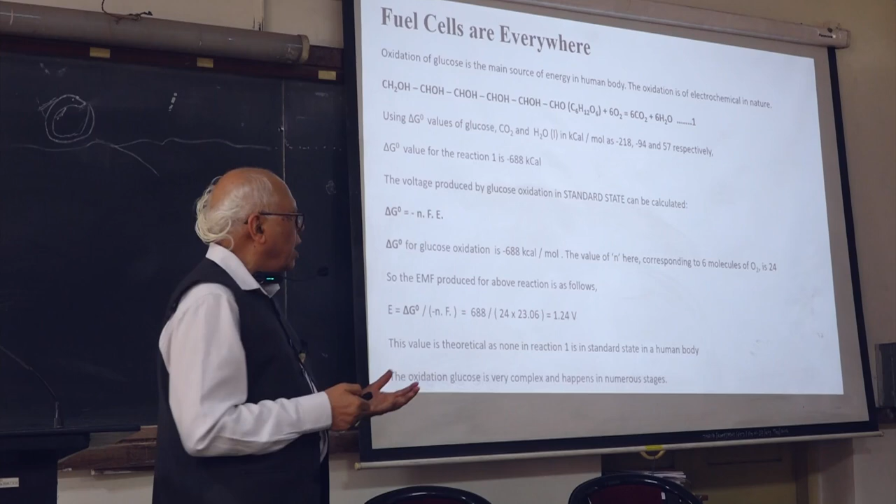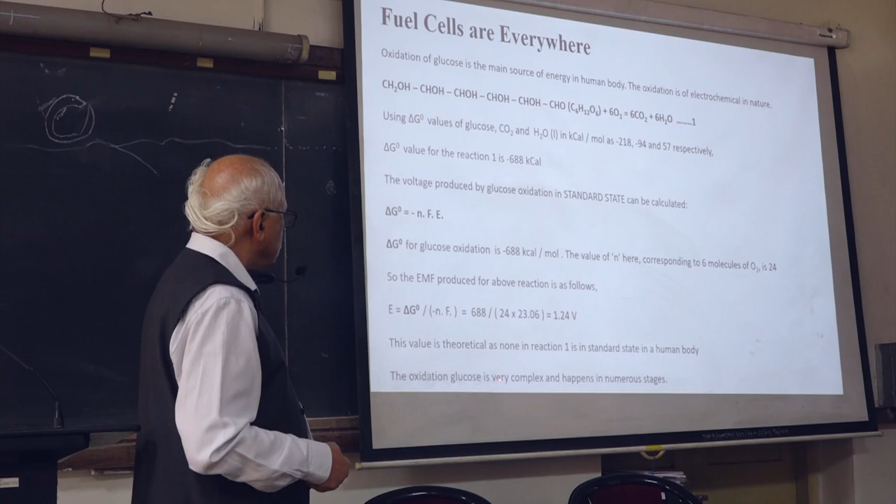I tried to understand it - this 1.24 is a theoretical value, and there is nothing in a standard state in the human body. This oxidation of glucose is very complex and happens in numerous stages. Let's look at it very quickly - these are some of the compounds involved. The most important compound is ATP, adenosine triphosphate. The body is able to generate these chemicals without any effort, it seems. The oxidation of glucose is a very complex process - food is consumed as a source of carbohydrate and it is converted into glucose.

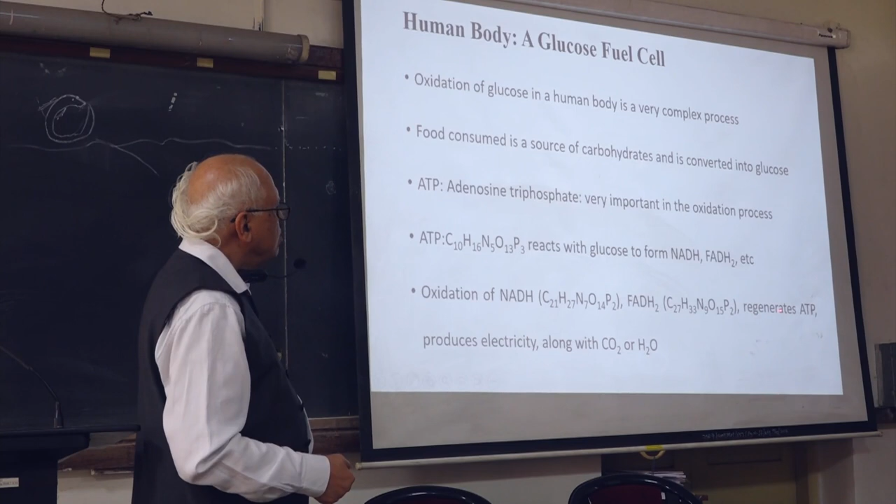ATP is very important, and ATP reacts with glucose. It doesn't react directly with glucose, but with degradation products of glucose, forming complicated compounds like NADH, FADH2, and many others. Oxidation of NADH leads to regeneration of ATP - the formula of NADH is this, the formula of FADH2 is this.

It regenerates ATP and produces electricity and CO2 or H2O. Amazing - when we saw glucose oxidation, we saw CO2 and H2O together, but none of these individual reactions produce both; either they produce CO2 or they produce H2O. In any case, there are maybe half a dozen steps involved, and each of them follows thermodynamic law.

Just look at what this means - the regenerated ATP reacts again with glucose and the cycle continues. It's like the halogen cycle: the bromine, iodine decomposes, hits the filament, and recycles completely. Here ATP is also doing the same thing.

Oxidation is an electrochemical phenomenon. It is based on ferric to ferrous conversion - like RBC is in ferric, they will become ferrous. This is the oxidation process, how it works. It's very complicated. This electricity leads to muscle contraction, which produces mechanical energy. Muscle contraction is responsible for all internal and external body functions.

This was something not so obvious to us. I thought it would be interesting to look at what the human body is like, in this last 5 minutes. The body has about 640 muscles.

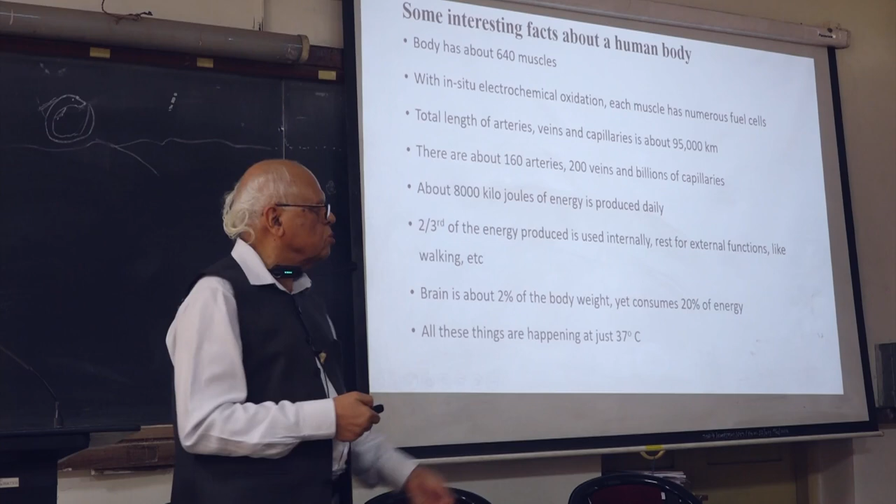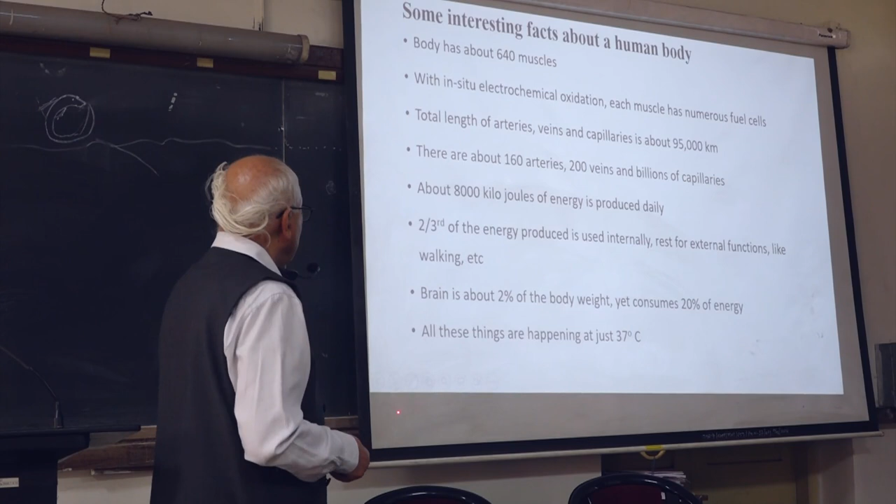We generate about 8,000 kilojoules of energy every day by oxidation of glucose. Two-thirds of this is consumed within the body itself, with pumping of the heart and brain. The brain is just 2% of body weight but consumes 20% of the energy. And all this happens at 37 degrees centigrade - it's just an amazing thing what our human body is.

I'll just summarize what I said. We covered a wide range of applications, from the halogen lamp at 3000 degrees centigrade to the blast furnace at 1500, and the human body at 37 degrees centigrade. Thermodynamics is everywhere.

We also looked into applications in aqueous solution, like hydrometallurgy - molybdenum extraction and HCl dissolving iron. We highlighted major differences between normal equilibria and those involving electrochemistry - electrochemistry uses delta G equals minus NFE.

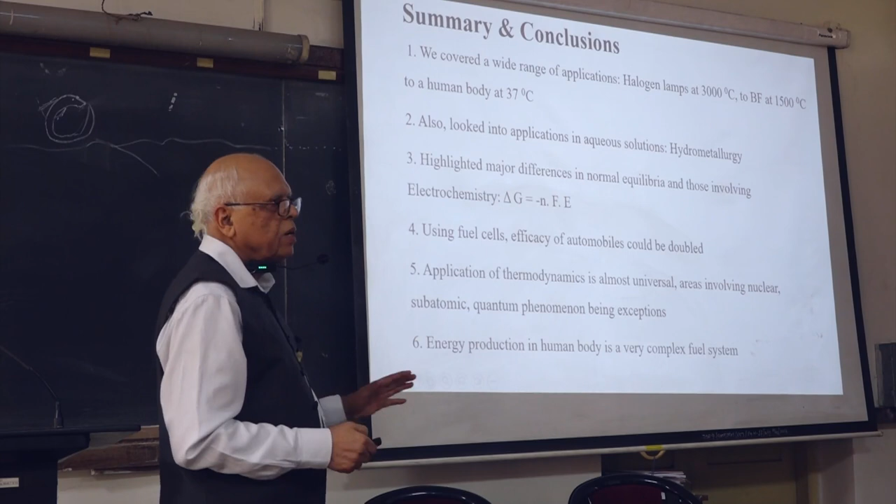Fuel cells - using a fuel cell, efficiency of automobiles could be doubled. Application of thermodynamics is almost universal, with areas involving nuclear, subatomic, quantum phenomena being exceptions - I don't think thermodynamics is applicable there. Energy production in the human body is an extremely complex fuel system.

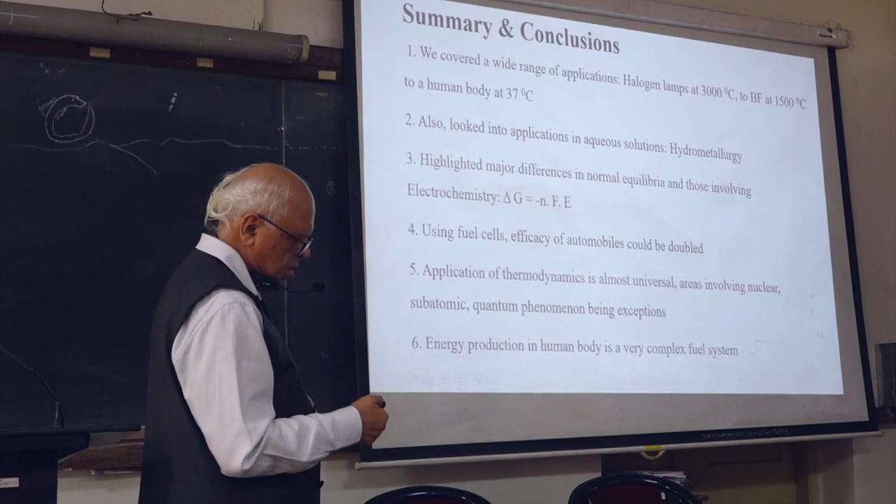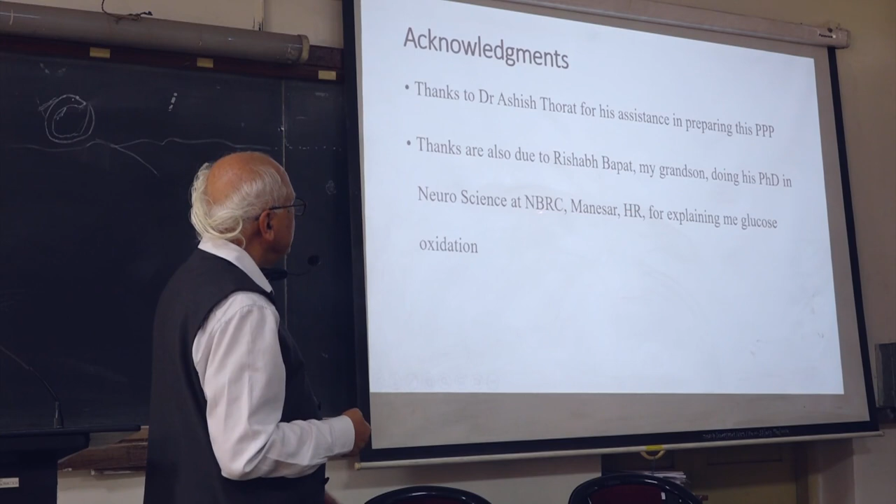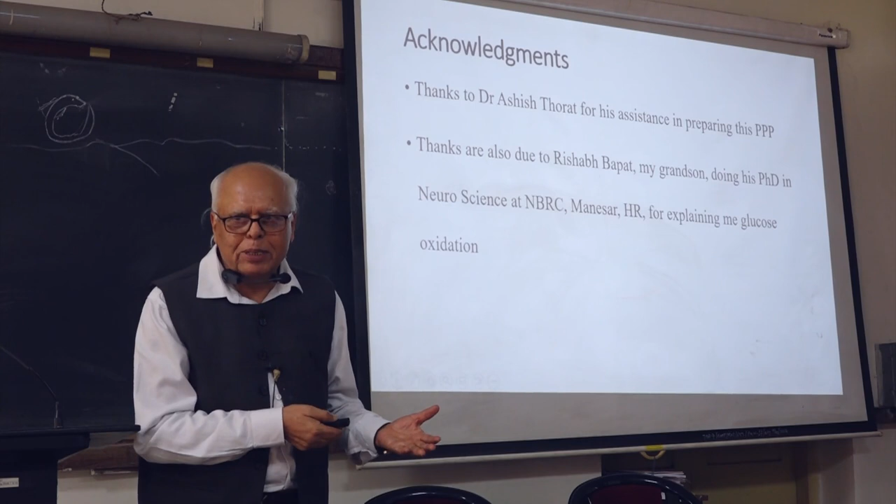Any questions, if you have time? Don't ask me anything about human body and glucose - I will have to refer to my grandson. Thank you. Yes? I wanted to know... just...

Oh, I see. Okay, which... I discovered it by chance. Thank you. I am surprised that a 30-40-year-old process, they had not looked into the azeotrope. It was such a common thing - you just put 30% to get 20%. The process just improved by a factor of 5.